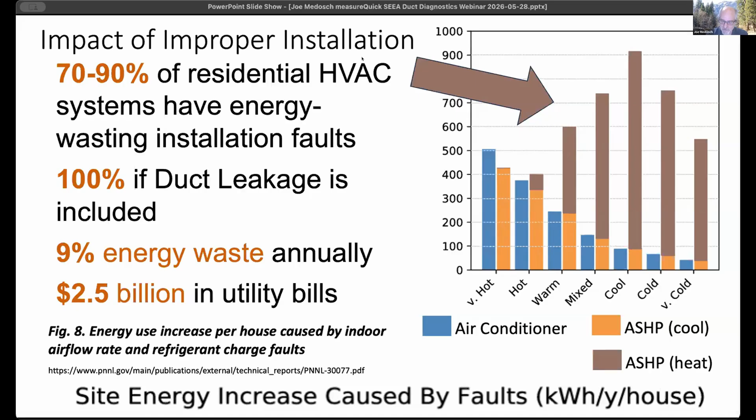So the whole duct concept has a lot to wrap around. We think of it as just being there, part of all our homes, and we're not actually acknowledging some of the conditions we really should be paying attention to. Most of the time, if you knew there was a duct concept in the title, you'd be seeing stuff like this - doing total pressurization or depressurization, total leakage, or even more complicated leakage to outside.

But this was a surprise for me because I came from this world. I actually worked with ACCA a long time ago. I lived in Georgia - Georgia was one of the first states that required duct leakage testing and blower doors back in 2013, that was 10, even 13 years ago. So it's been around for several years in some areas, but is it actually enforced and done? Now I'm in the HVAC world and out of more of the energy and IAQ space, and I'm stunned at how few people are actually testing their ducts, evaluating airflow, or doing anything to figure out the real problems - because the boxes are usually fine. It's how do I get from A to B that's actually causing all the issues.

So this was kind of a major disappointment, the amount of people that are really assessing that. And there are some great folks on this call in the background who do this well, so chime in if you have advice about how you could recommend other contractors. The analogy I usually give somebody - if you're going to get new tires, I'm like, we need new tires, it's that time of year.

It's expensive. And the tire person put them on and says, I really don't have a tire gauge. I think that the amount of air that's in them is good. So come back if it's low, and we'll put some more air in it.

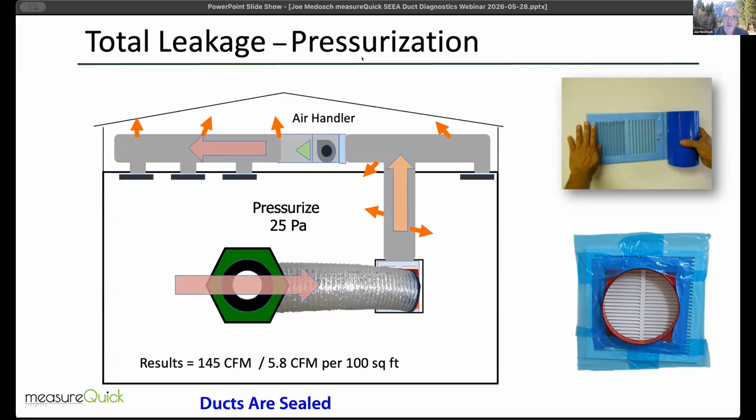If you're installing ducts, if ducts are a part of your HVAC process, and you are not measuring the conditions, I'll be honest, I kind of say shame on you. There are so many ways to do this now - the duct tester is clearly the most obvious, but we're now moving into another world where we can use things like the TrueFlow grid and other complementary tools to confirm, is it performing correctly? And even maybe can I extrapolate whether there's potential leakage in this system?

So this is our normal duct leakage test. And we're now moving past this into other options. NCI and other folks are promoting that I could use my TrueFlow grid to actually get a total measurement out of this. That's the greatest thing about it - there is no greater tool on the market right now that actually assesses static pressures, which most people are not measuring either, and airflow, all in one quick step.

This is actually usually - if it took 10 minutes to do this test, it was probably because you were first time doing it. It goes fairly quick and you can get all your measurements and find out what your total flow is.

Once I know what the flow is after my return, I could go around and use a simple hood to measure the supplies. This is an estimated leakage, but if I have so much airflow coming out of my unit and I figure out my supplies, there's an indirect concept now - I can kind of estimate, do I have a lot of leakage? And if I know where my ducts are, then it would be leakage outside. So there's a lot of ways now to confirm what are my issues and challenges between airflow and duct supplying back into the house.

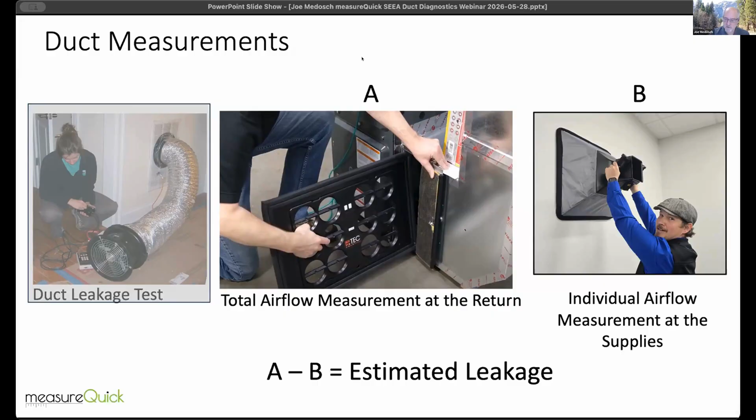So there's a lot of great training out there on this kind of stuff. NCI is a number one source for using these methods and promotes this regularly. And this is nothing new - this has actually been around since ACCA has been promoting QI5, which is, again, you're designing your system, you are testing the ductwork, you are doing airflow measurements, and you're balancing.

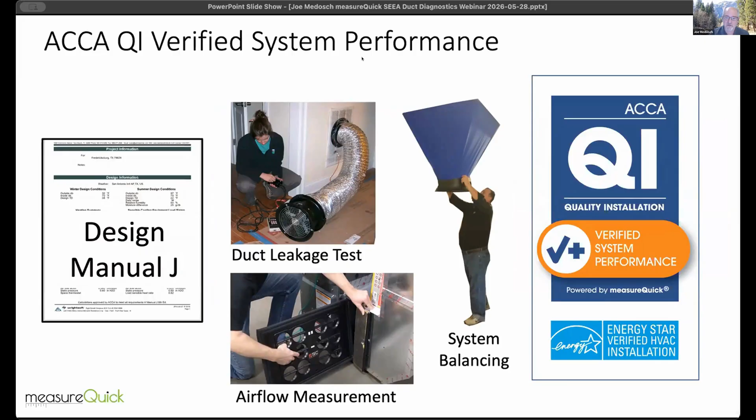So this is something that's built into measureQuick as an option, as the highest performance you can actually do. And this is not a really major challenge. People are like, oh, QI5, that's so hard - and the reality is it's actually very achievable. Lots of contractors across the country are doing this on a daily basis. It's not just that it's a possible task - they are differentiating themselves from others because they're actually verifying and confirming their performance with design and multiple tests.

So I should introduce measureQuick, because many of you may be familiar with TEC, the TrueFlow grid, the duct tester and the blower door, but measureQuick is still a little mystery for some people. We are a diagnostic application that's brand neutral - we actually work with a whole lot of other apps that are out there. These are all Bluetooth wireless tools. We gather them all together and then provide a variety of diagnostics based upon what you're reading.

One of the tools on there is the DG8 and 1000, which also means you're allowed to use the TrueFlow grid integrated into measureQuick. It's a great opportunity to do two great things at one time. But in general, we're usually the first stop to find out, is the system having problems, and what can we do to upgrade it or make it more functional in terms of getting efficiency and performance out of it. So that's really our main focus, and we probably work with a variety of tools that you've got there.

This is what you're going to get out of measureQuick. You're actually going to get a score based upon the measurements we did from all of our probes. They're giving you refrigerant charge and heat transfer, air distribution, whether or not your refrigerant's working well, and your airflow is also working well based on our measurements.

You can use the TrueFlow grid, or we have our own method for measuring airflow with psychrometers. In general, now I have an actionable number and an actionable report to talk to my client about, as to what are the things we need to be doing.

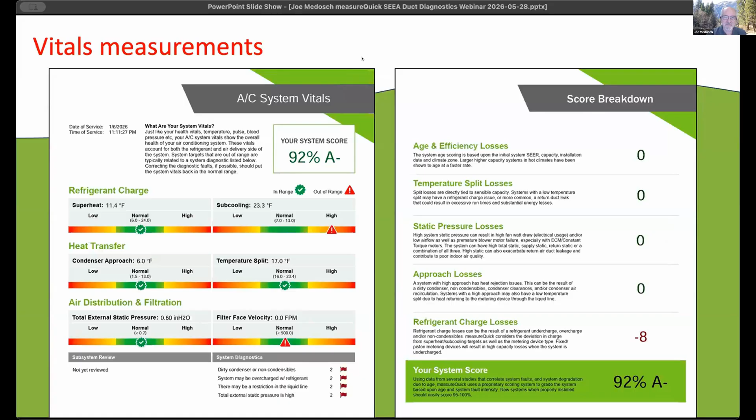Or maybe this is an older system and it's time to start thinking about how to upgrade, or maybe there's a great rebate in your area like there is in mine, where it's worth your time to look into getting a really good heat pump to replace your existing system. Whether it's dual fuel or not depends on your climate and your rebates. But in general, many people are looking to do this, and it's a great option to give people more ability to control their comfort zones.

These are the manometers. These are all of the tools that we're using. So we have two manometers, three psychrometers—one's outside for outdoor air—we've got refrigerant pressures and temperatures, and electrical is an option, but those are all things that you would do.

And those are going to give you your vital score, which I just showed you. It allows you to benchmark your system, so when people come back, they can confirm if it's working well.

We also do live streaming, where I can have one technician stream their information live back to the shop or back to other technicians.

These are all of the fundamentals that MeasureQuick is built onto. So it's not a snapshot of measurements—these are actually all 9 probes on all the time, giving you live information, and they're completely dynamic, highlighting exactly what it is you need to know about this system while you're there at the time it's on. So here's the probes real quick.

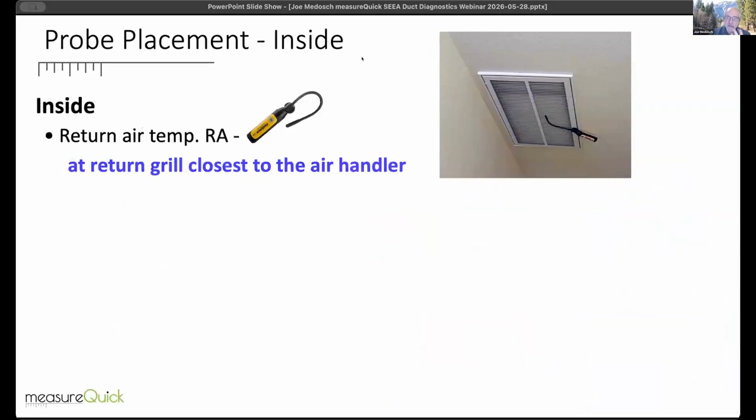Inside, I've got one at the return and one at the supply. These are not in the unit—notice that we're not actually measuring the appliance, we're measuring the system. So this is where duct leakage outside and a variety of other stuff gets confirmed with the measurements that we have.

We actually know your temperature, what your temperature split should be. And if your ducts are in the attic and it's a hot day, we could give you an estimate that you probably have duct leakage because your temperature split's too low. You're bringing outside air into your ducts and your return's high, so we'd give you that as a diagnostic. But our supply is actually in the register.

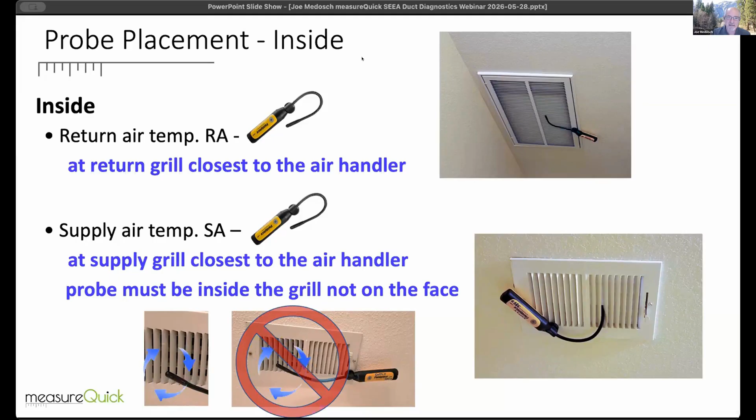We want really good temperatures from inside, not just what's on the face. So these are two of your indoor measurements. The other one you want to be doing is your static pressure.

This is something everybody should be doing—if you're an HVAC contractor doing energy diagnostics, this should be done every time, because you never know when the homeowner decides to go get the brand new super MERV 3000 filter and try to block the airflow, thinking they're also going to capture every particulate known to man, and they only restrict the airflow that was there, causing not just airflow problems but a variety of dynamic problems altogether, including what may show up in your refrigerant charge.

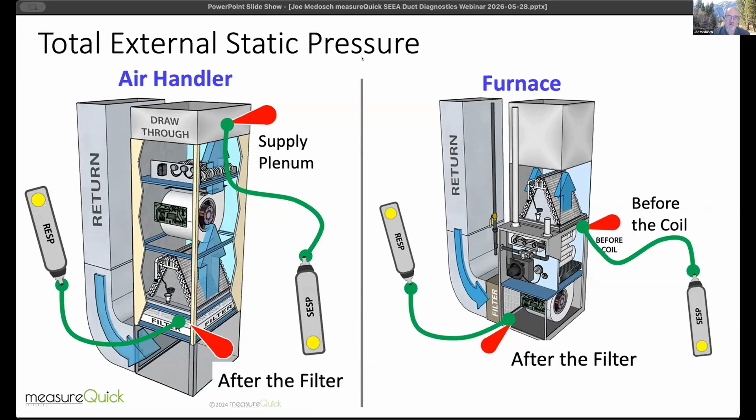We'll talk about that in a second, but this is one of the easier evaluations. This is part of what the TrueFlow grid is doing also. So if you want to kill two birds with one stone, the TrueFlow is going to give you these similar measurements plus more—they're actually going to do something more of a screening.

This is built into the NCI screening, which is in MeasureQuick. This is also in the TrueFlow grid app itself. You can do a static pressure screening by itself, just trying to do static pressure. If you didn't have the grid, you can still do great diagnostics with their app, or with MeasureQuick—these are all free options that are in both of our apps.

So if I want to find out if my return is too small and I have restrictions, or my filter is restricting, or my coil or my supply—whatever those things are that Steve highlighted a few minutes ago that are on their report—these are the same things you're getting out of MeasureQuick and the NCI static pressure screening.

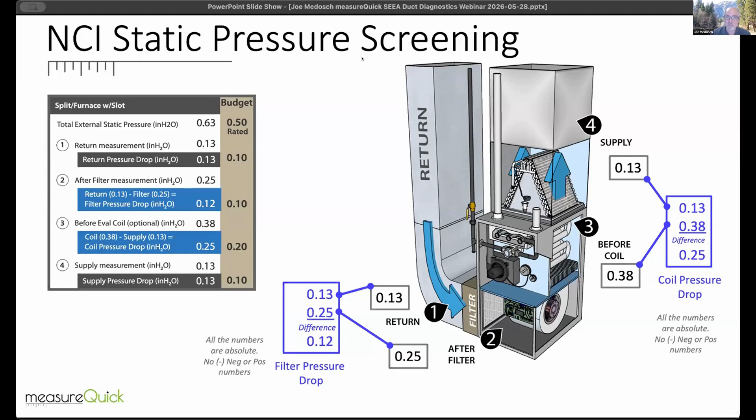So I could know within a few seconds what my actual issues are. As highlighted, a lot of times it's that the return is too small or there's a restricted filter. Those are things that are a lot easier to correct, and a lot of times they're actually really near the unit itself where I'm getting my great restrictions. If not, you're trying to figure out how to make this part of your upgrade in diagnostics.

These are what's outside, so I have four inside. These are my outside probes. I'm basically just measuring the refrigerant pressures and temperatures, and I have an outdoor air temperature, which gives me guidance as to how well everything is performing. Those are all of the 9 probes that you need.

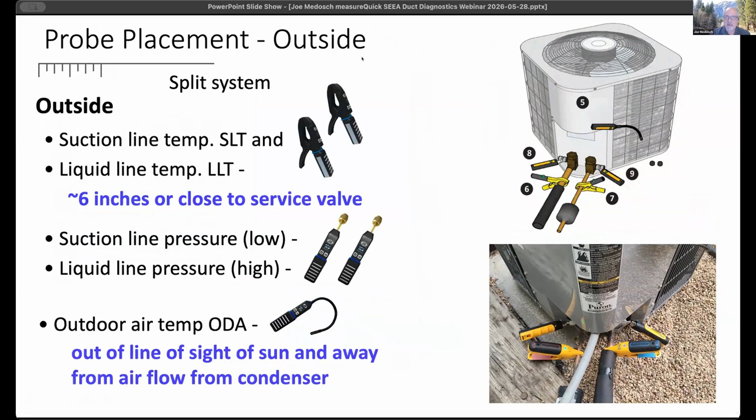Once all those 9 probes are on and the system is at its full capacity, then I can give you great diagnostics as to what's going on or what the problems are. And there's some logistics where we talked about ducts and duct performance and airflow, so some of those will show up indirectly or directly in MeasureQuick.

So you get free diagnostics in MeasureQuick. We do have options if you want to get more premier features, but in general, you can just get the probes, put them into MeasureQuick, and get these free diagnostics. It's giving you this great information, and they're all actionable. You click on any one of them, and it gives you information about what you should do next. It links you out to Bryan Orr's HVAC School for more information on a lot of this stuff. So it's all live data built into MeasureQuick.

I could totally spend a lot more time on it, but in general, between our two tools, you can actually do an amazing assessment as to what's going on with this system. And if you think it's an outside issue with refrigerant charge, you need to be measuring airflow before you make any adjustments with refrigerant charge.

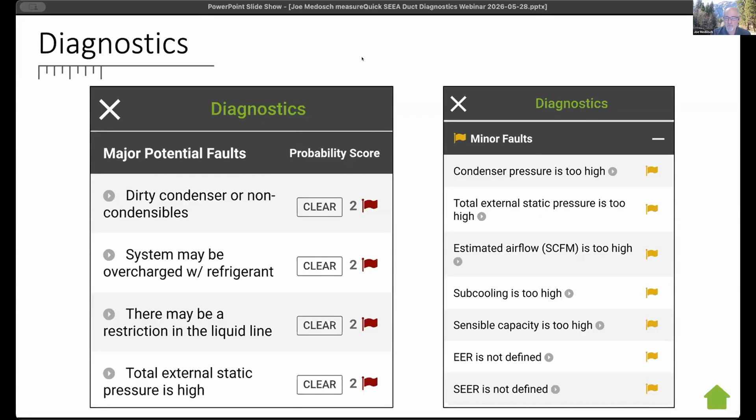It's a real common problem in our industry that people think, oh, I think it's low on charge, or I need to pull some charge out. You need to find out if the airflow is correct, and airflow doesn't happen visually. You must use a tool to measure airflow. There's really the one that's the most accurate and most dynamic, and that's the TrueFlow grid. There's no other better way to measure true airflow than with the grid.

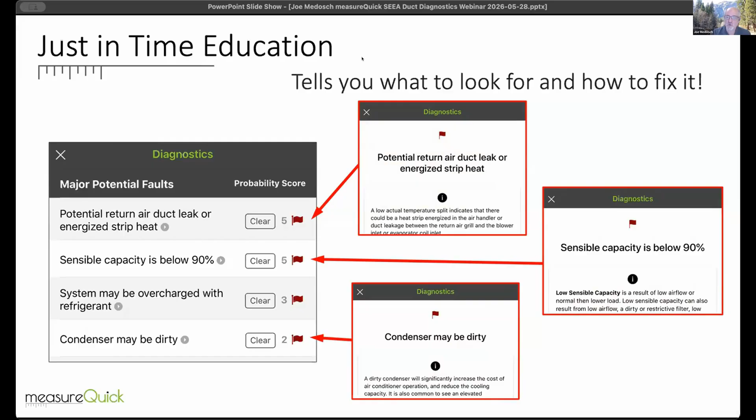These are some of the things you get there. Notice that the system may be overcharged, but at the top it says potential return duct leak or energized strip heat. It means that our temperature split is too low. These are all the things you're getting in MeasureQuick as part of their free diagnostics, and it's telling you what to do, what to look for, and how to step through those.

We do offer some other premier services, so if you want to use our subscription, it's there. But I just thought I'd highlight some other options. If you do need these other conditions, you can reach out to us and we'll gladly assist you with that. But in general, the diagnostics I mentioned a second ago are all part of the free process that MeasureQuick includes.

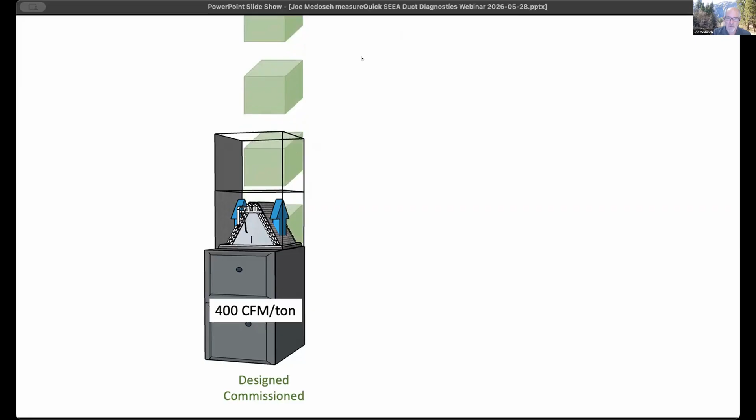I tried to visualize and explain that maybe you designed and commissioned a 400 CFM unit, and then later you come up and find out, well, now I haven't measured it yet, but I sense there may be an airflow problem. And when I did measure it, I found out there's only 330 CFM. People are failing to inspect these conditions before they're checking refrigerant charge.

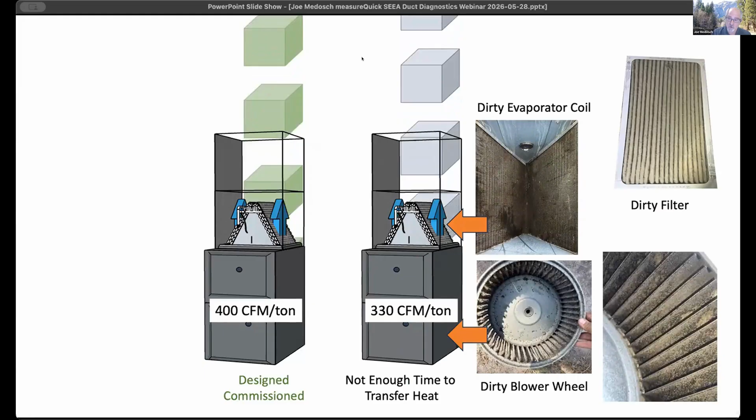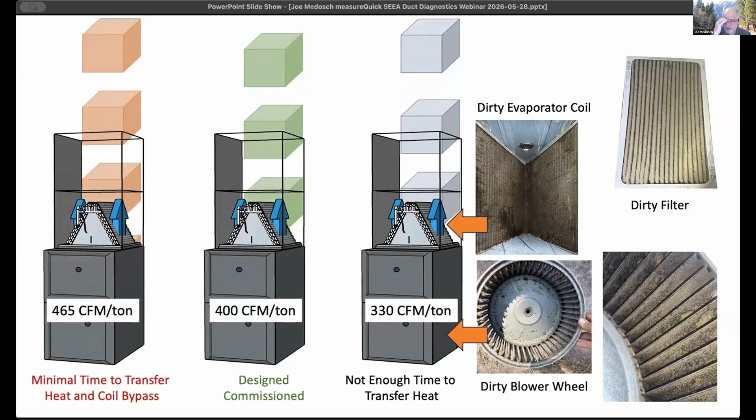So I have a dirty blower wheel, a dirty coil, a dirty filter. All of these things are going to slow your airflow down, and they're going to cause problems, not just system-wide with your airflow, but they're going to show up dynamically. The other one would be if somebody set the speed wrong. There's a long list of stuff that could be happening with the wrong motor, wrong settings, a variety of stuff that wasn't done initially, but people felt there was cold air or hot air and they just ran out the door and all was good.

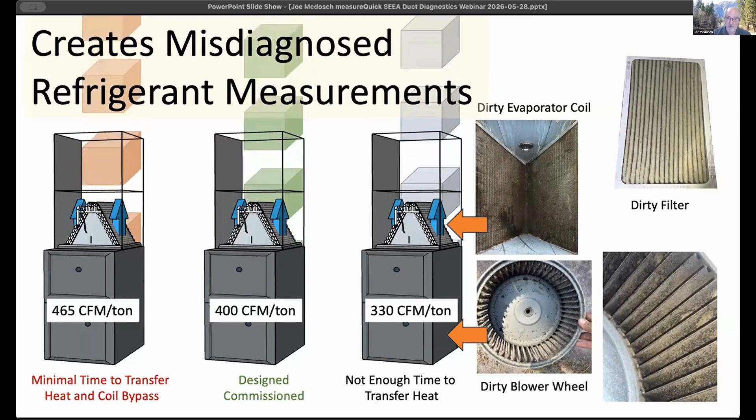In general, these airflow issues can actually create misdiagnosed refrigerant measurements, so I may have a really low superheat or my subcooling could be off. There's a variety of conditions that show up in my pressures and temperatures on the refrigerant unit outside of the condenser that are really caused by airflow problems inside. We want to remind you to be cautious about just adjusting the refrigerant to confirm whether the system is operating correctly, without doing proper visual diagnostics and measurements of actual airflow. This is one of the greatest problems in our industry - people think everything's fixed with refrigerant, either more or less. So a fundamental rule is you need to confirm everything is clean and working, including the coil outside, and that you've measured what your airflow is.

Now my forecasting method is going to tell me whether or not these ducts are sized correctly for the system that's there, or maybe they just need a few tweaks or adjustments to get the airflow out to certain areas. So I'm sealing it up or determining what I need to do to adjust those ducts, and then I jump up and make sure my registers and my filter are right. I have to use the TrueFlow grid again after I put in a new system to commission it with the airflow, then confirm it with MeasureQuick to confirm I actually have the correct refrigerant charge and correct airflow. Now I'm able to get a score out of that.

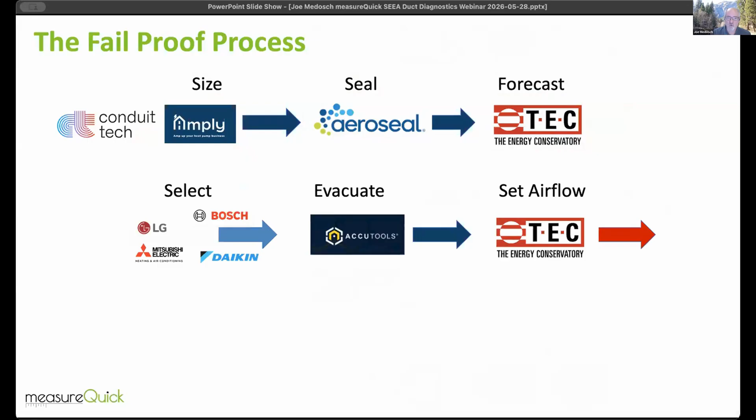This is Jim Bergmann's concept of what is a fail-proof process. So you can size the system well. You can get a quick Manual J in a matter of minutes using CoolCalc or Amply as an approved Manual J ACCA-approved process that actually walks you through the house and tells you what you should be doing. If your ducts are super bad or you need to make them tighter, which is a cautionary tale for heat pumps, you can use AeroSeal and you're going to forecast with TrueFlow once you've got your ducts in line, and know what you're going to do if you replace something. Next, we're selecting our equipment. We evacuate with AccuTools or a similar system, and we set the airflow again with the TrueFlow grid. When you're done, you can commission with MeasureQuick and even prove it by doing more of an ACCA Manual J process. So this is the fundamental method that's out there.

Unfortunately, so many people are really not following through with doing some of this additional testing to confirm. If you don't test, you're guessing. That's a common theme that's been out there for quite a long time.